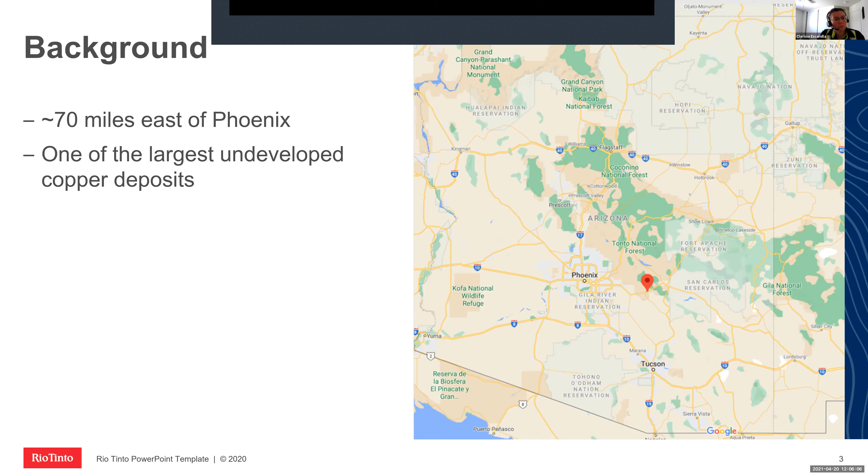So in porphyries, the mineralization occurs in the wall rocks. We have indicated and inferred resources of about 1,900 million short tons, with an average copper grade of around 1.5% copper. That puts it up there with Bingham and Grasberg and some of the bigger mines.

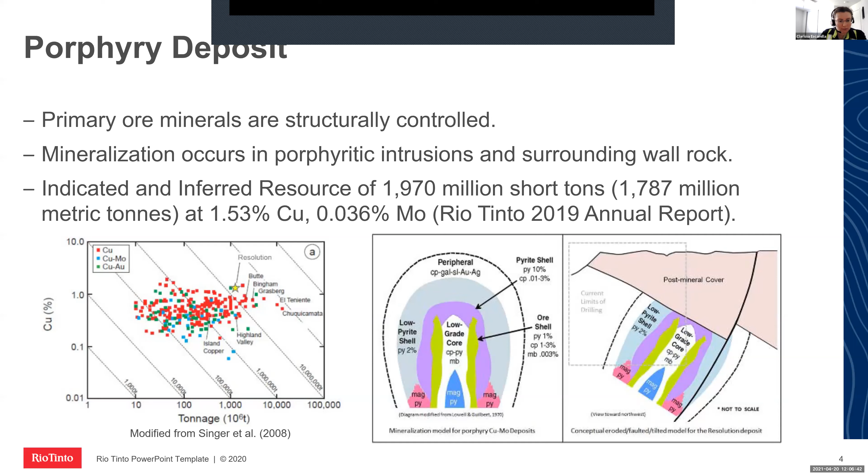So last year we were working on deepening 9 shaft. It was originally built to about 4,800 feet below the surface, and our project was to increase it a further 2,000 feet and connect it to 10 shaft. The excavated diameter was about 24 feet, and we finished deepening it in October. We got it to about 6,700 feet. We supported the shaft with shotcrete and concrete, and I'll talk about that in a second.

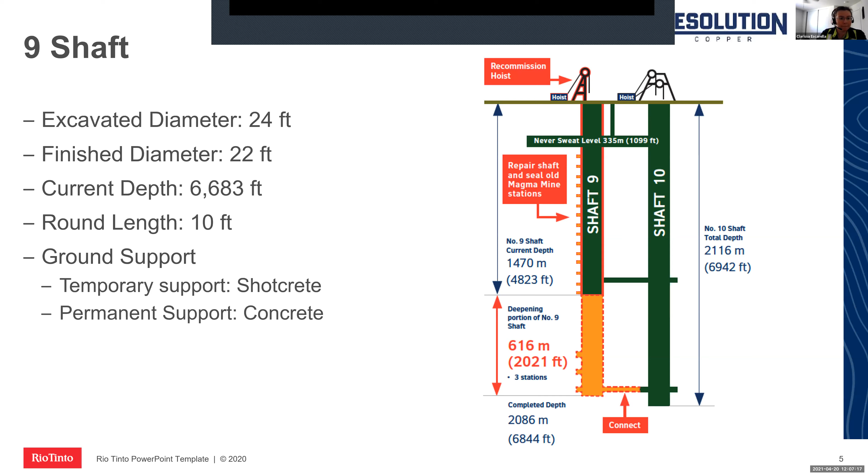Some interesting facts about the project: about 800 blue whales worth of rock were removed just to do those extra 2,000 feet. We installed 11,000 rock bolts. It's about 6,800 feet deep, which is 23 football field lengths, just to put it in perspective. We used about 500,000 pounds of steel, which is 3 times as heavy as the space shuttle.

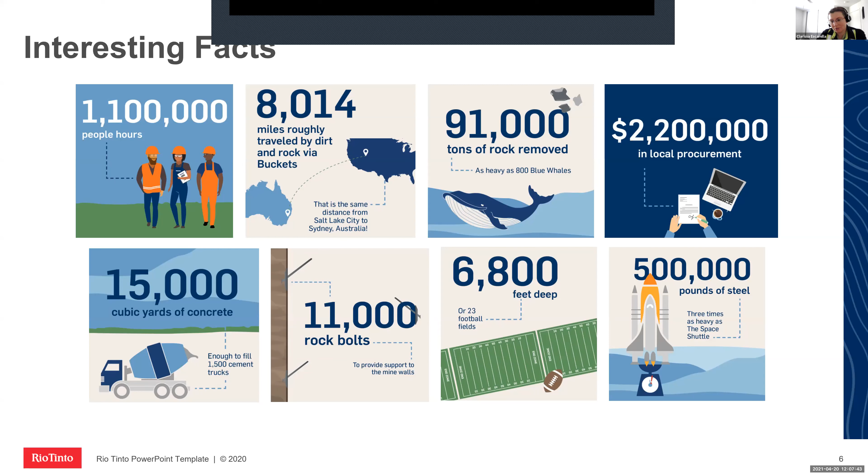So a shaft is a vertical opening that provides access to underground mines. They're used to send people and materials underground, bring ore out, and to provide ventilation and utilities. The purpose for deepening 9 shaft for us was to increase the ventilation and to provide a secondary escapeway to increase safety.

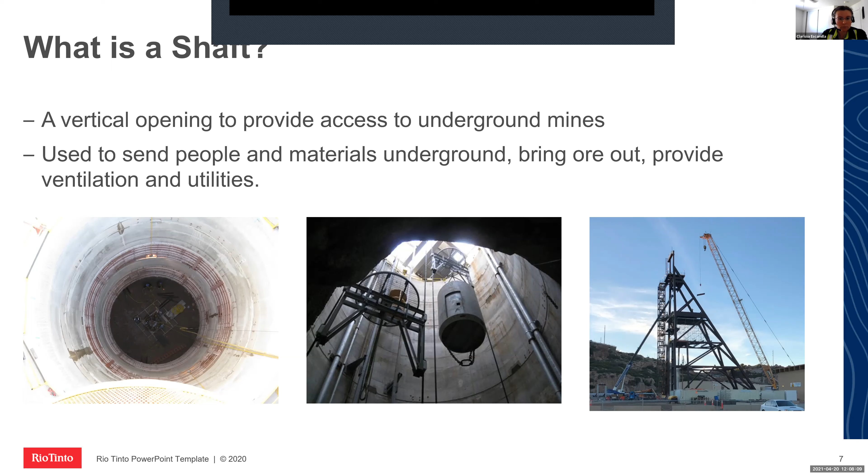So this is your typical shaft sinking cycle. On the far left, it starts with drilling. You drill out a round, and our rounds were about 10 feet. You blast it, then you muck it out, scoop all the rock out, put it in a bucket, and hoist it up. Then you install your ground support, and then you lower your permanent support, which is your concrete liner. Then you clean off the bench and scale it, making sure everything's good before you start over again.

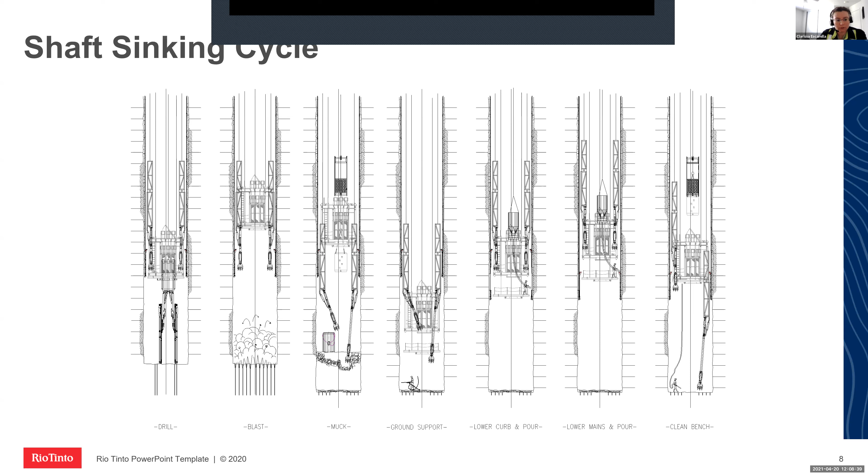So when you're supporting ground in the shaft, traditionally you use bolts and mesh. In the picture on the left, you can see the mesh conduct with some split set bolts there. At Resolution, we were using shotcrete and doing a boltless advance. So what we do is blast, clear out the muck, spray the round with shotcrete, and then lower the permanent liner. We could use the shotcrete as temporary support before lowering the permanent liner for anywhere between 36 and 72 hours before it had to be lowered.

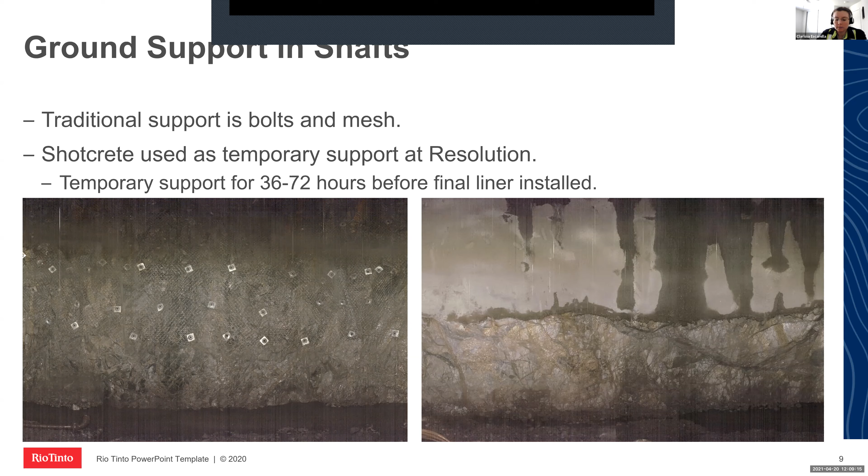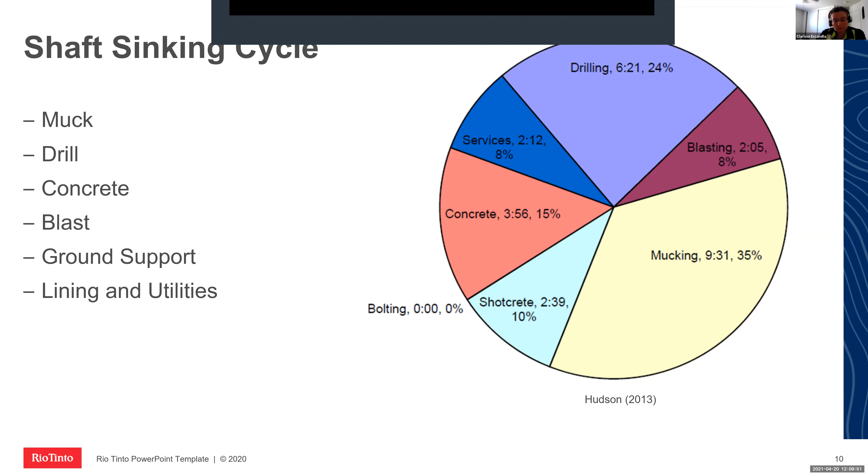In a shaft sinking cycle, most of the time gets taken up by mucking, about 35% of your time. Then drilling, which is about a quarter of the time, followed by installing your concrete liner. Shotcreting and services and blasting take about 8% each. We didn't spend much time on bolting with this method because it was all just shotcrete. We did have a few places where we bolted, where it was raveling or where the shotcrete just wasn't going to work, but for the most part it was mainly shotcrete.

So there's a few risks with doing this method. The distance between the permanent concrete liner and the shaft bottom is really important. The greater the distance, the higher the risk for failure is, because it's your permanent support and what's going to hold your shaft open. But the closer the liner is to your advance, it risks damaging that liner and cracking it, which can also be dangerous. So the liner has to be kept as close as possible, but still far enough away that it's not damaged. For us, this was about 3 rounds worth, 30 to 40 feet.

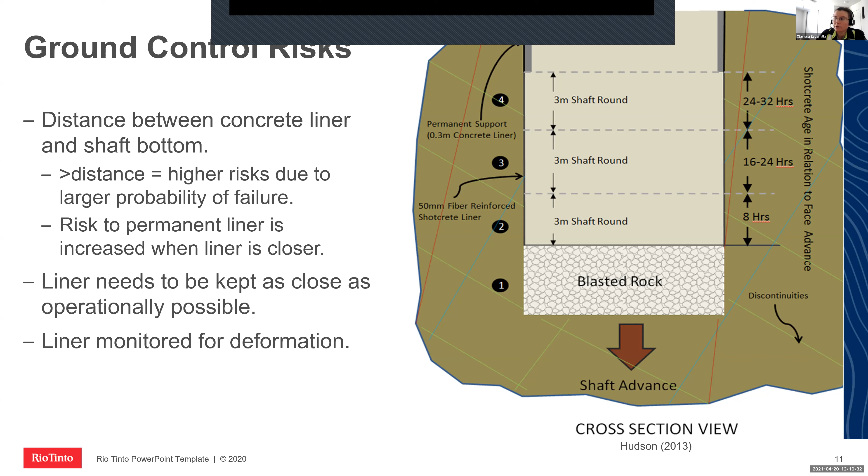Using shotcrete over bolts, some of the good things about this were a faster ground support cycle time, about 30% faster. It costs less than traditional support because you're just spraying shotcrete. It also acted like a skin and lowered the heat in the shaft. And there was less exposure to ground hazards for personnel working on the bench in the shaft because there's less cycle time and fewer incidents related to ground support occurred.

So some of the cons: respirators are required during shotcreting, and there is a small safety hazard because you're working with stored energy, spraying the shotcrete out of a hose. It also left less time for mapping the face. With bolts and mesh, you can kind of look back up and see past the mesh and see what's there, but shotcrete completely covers it. So you get your one chance to see the face, and that's it.

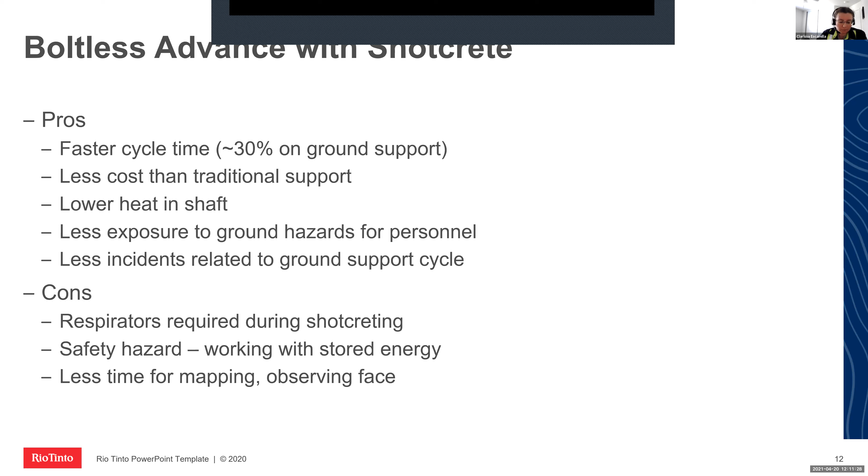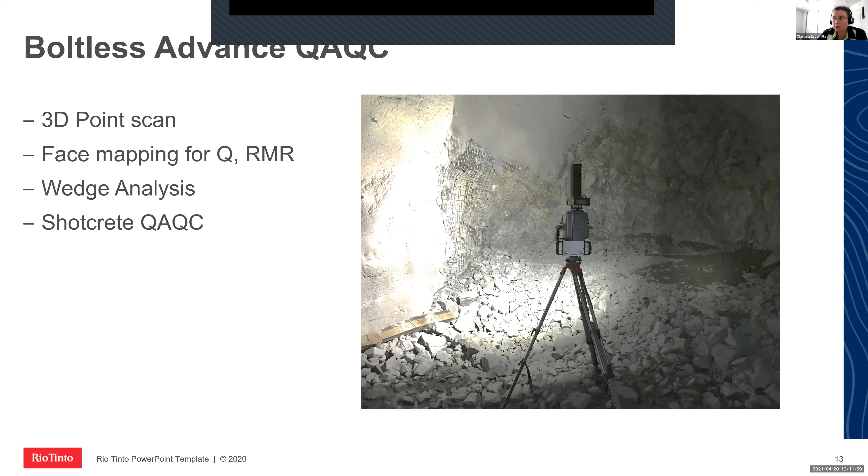To make sure this was progressing safely, we did a lot of QA/QC. This is a picture of our 3D scanner, which was very important for all our reporting. We took 3D point scans and did face mapping for Q and RMR values. We also did wedge analyses to make sure shotcrete was still the right method for each round, and then did shotcrete QA/QC to make sure our shotcrete thickness was adequate.

This is a picture of our 3D point scan, and on the right is a picture of the actual scan. Once you load it into the computer, you can spin it around, zoom in and out, and look at it. We'd compare the scan to the design and tell how far out of design we were, if we were overbreaking or underbreaking, and correct it before it became a problem.

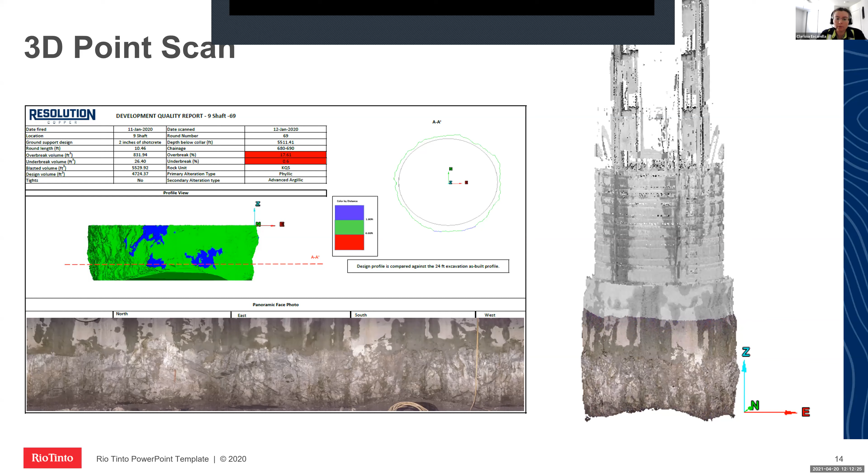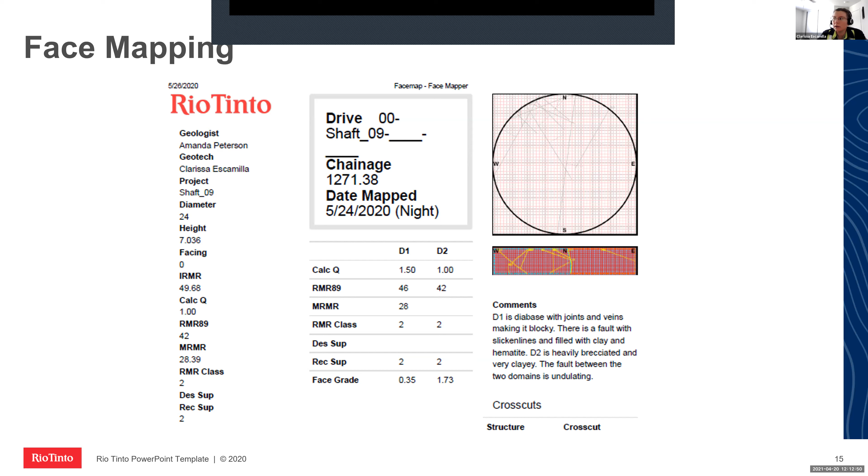We also did some face mapping. Before they shotcreted each round, they'd muck out the rock and send us down to look at the structures. We'd record the structures and their orientations to get a Q value, which we'd use to determine if there were wedges or if this was still the right method to use. The scanning also allowed us to get the actual true thickness of faults, which was really helpful for geologic modeling, because we could load up all the scans in a line and tell exactly where the faults were, what orientations they had, how thick they were, and where they were dipping.

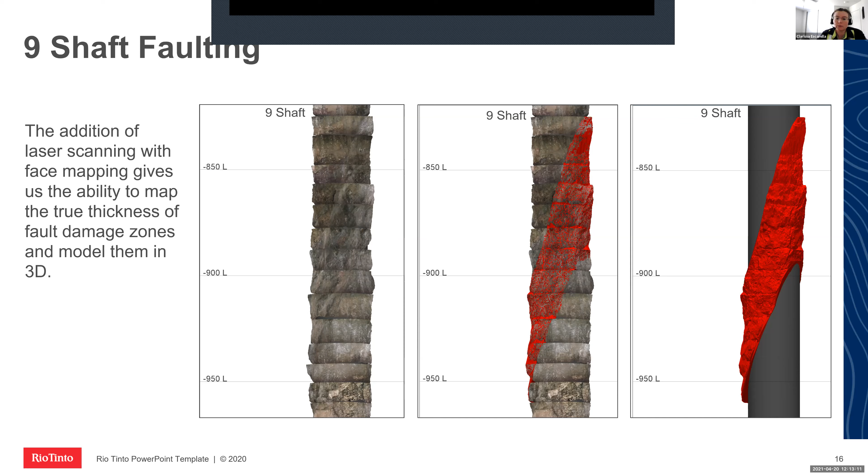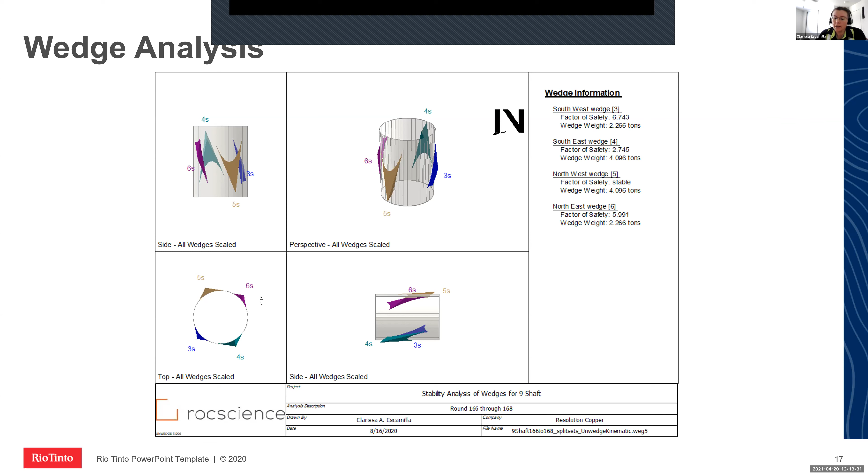We also did wedge analysis, which I mentioned before with the face mapping. We'd record the structures, and for any that were intersecting, we'd look at the factor of safety and determine if the shotcrete was thick enough to hold that wedge in place before we poured the liner, or if we needed to do something else like bolting.

With each scan we took, the scanner was able to pick up the previous rounds as well. Since we left about 3 rounds open at a time, we could load them up and see how the shotcrete thickness was looking, and any areas that weren't thick enough, they'd go back and respray before pouring the permanent liner.

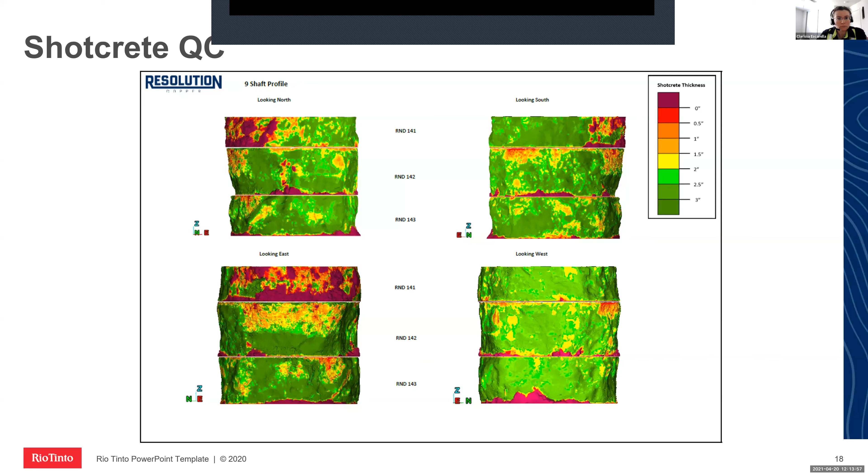Part of deepening the 9 shaft was breaking through into our TPL2 lateral development to connect with 10 shaft. We had Itasca do a model for us, and it indicated that the interaction between the shaft and the lateral development would start about 40 to 50 feet away. The crown pillar, the amount of rock between the shaft and the lateral development, when only 40 feet thick, indicated there would only be damaged and destressed ground left.

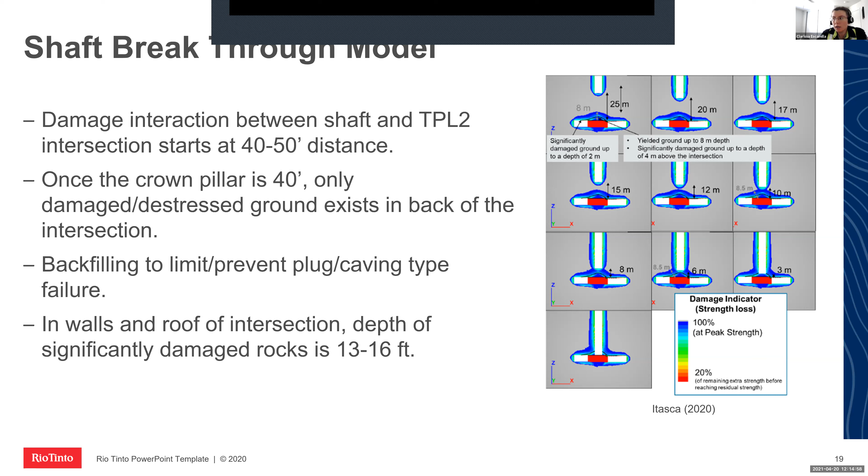So in order to prevent a caving type failure, we installed a lot of ground support in the lateral development, and we backfilled that area to prevent the caving failure. In the walls and roof of the intersection, it indicated the depth of significantly damaged rock would be about 13 to 16 feet deep, and that's about what we saw in our probe holes as well.

So breaking through into the lateral development, before the shaft reached 50 feet within the lateral development, we just proceeded as normal. Once the shaft was less than 50 feet from TPL2, we moved into phase 2, where we piled the muck underneath the area where the shaft was going to break through. We monitored for ground deformation and sent out daily reports. We decided that if we encountered poor rock in those 50 feet, we'd reduce the round length and pour the liner closer. We also did resin injections into the corners of the intersection to strengthen the rock.

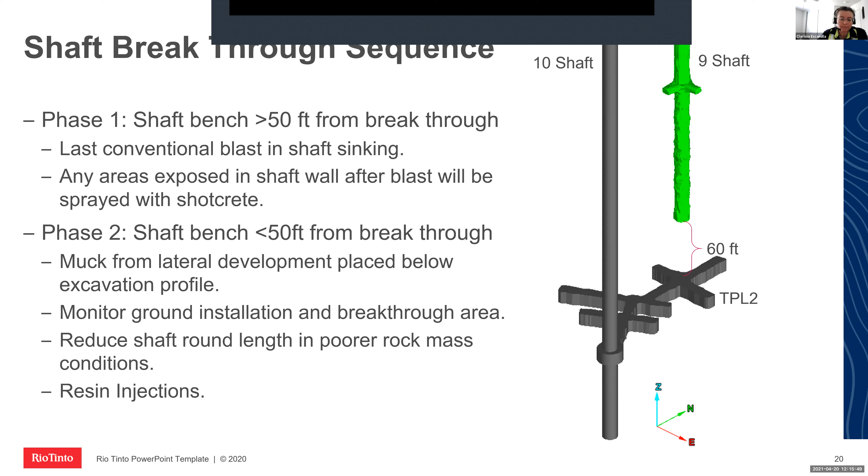So we installed a lot of monitoring systems to make sure everything went well. In the top right is a picture of an MPBX, which is an extensometer, and they measured the deformation in the rock, the extension. We also used blast vibration sensors to make sure we weren't aggravating any joints or faults.

We had fog lights, which stands for fall of ground. The way those worked were, if the rock moved more than a certain amount, it would turn red and everyone would know not to go into that area. We didn't have any problems with that though. They all stayed green the whole time.

And then we also installed geophones for looking at seismic events. But our geophones, we weren't able to get them calibrated before breaking through. So we were able to tell if we were having seismic events, just not where.

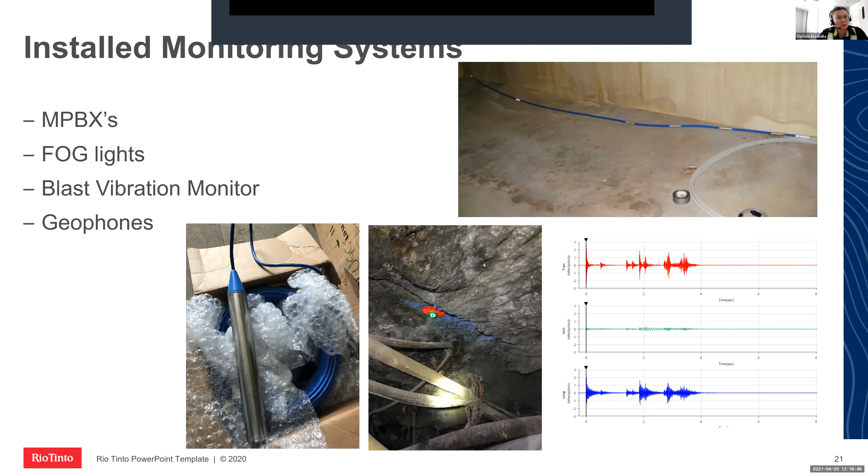The monitoring plan was essential, to make sure that the deformation didn't exceed the ground support. The blast vibration monitoring was really interesting to look at. We didn't notice anything weird going on with any joints or anything slipping. And then the laser scanning of each round didn't indicate any problems. We did a bunch of damage mapping and took photographs of the lateral development area just to make sure we could compare afterwards to make sure there wasn't any damage.

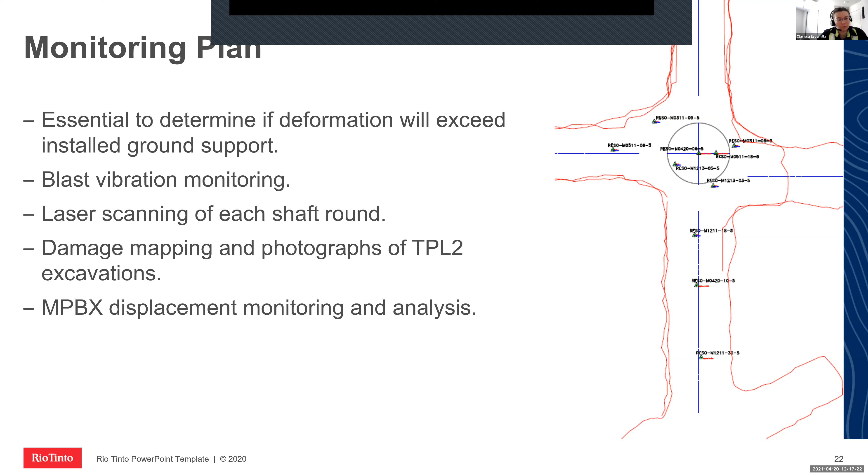And then we did a lot with the displacement monitoring and analysis as well. So this is the area where we put the muck underneath the area where the shaft was going to break through. We were a little short on muck, so we ended up building this wall around it and filled it with foam just to cushion it so it wouldn't damage the level when it broke through.

So when you're building a station, usually you want to cut the corners off because the stress concentrates there and they'll fall off. Since we were breaking into a station, we decided our last round was going to be a 20-foot round because we didn't want anyone walking on a 10-foot bench of distressed ground. And we didn't cut the corners because we weren't able to with the drills that far away. But it turned out really well because the ground was actually really high quality.

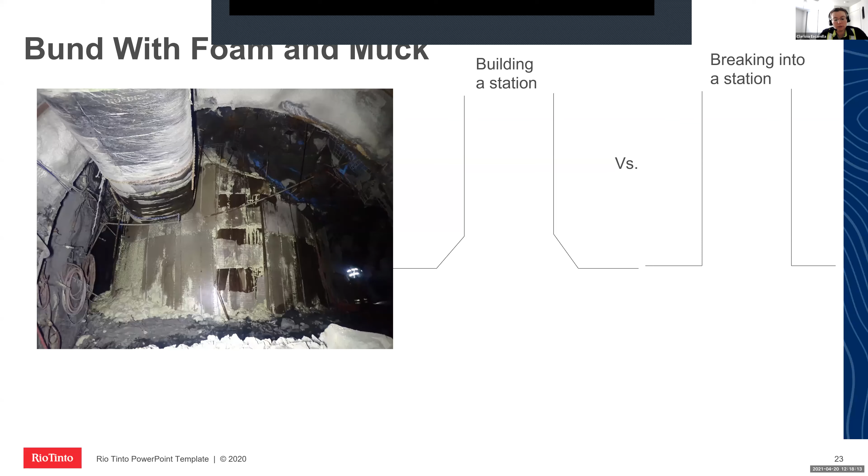So this is a video of breaking through into the area. The breakthrough area is behind that bulkhead. We weren't able to get a camera closer. But if you watch, nothing in the level moves. It's really neat. It's great.

The air rushing through is when the muck fell down. And nothing even shook. There wasn't any damage that we noted. And overall, we were able to complete it safely, which I think was a really big thing.

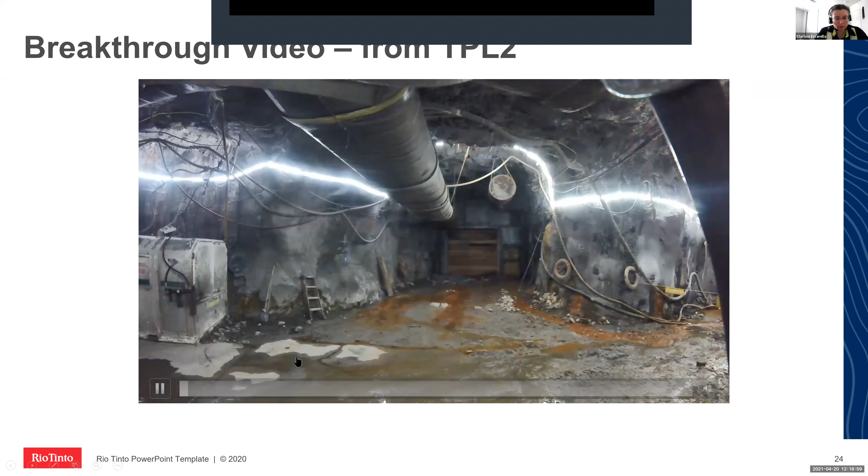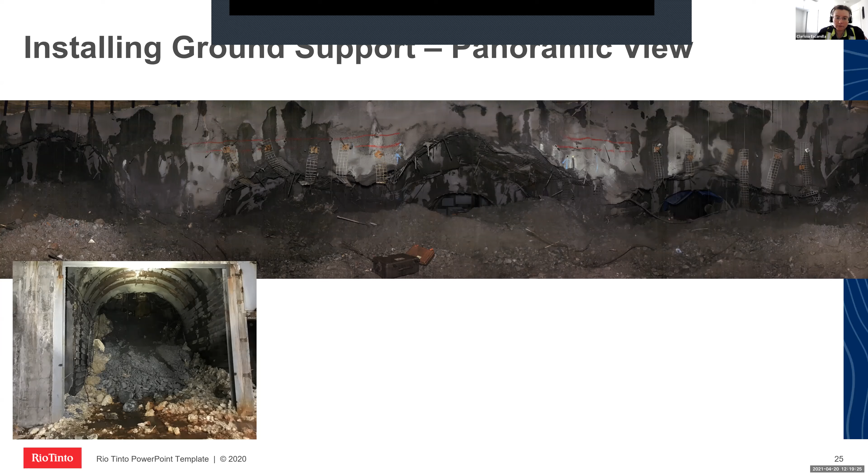So this is installing the ground support after the round's broken through. The picture on the bottom left there is the muck that spilled into the other drifts. We installed some cable bolts and some grouted dowels above, and since the corners are really sharp, we wrapped them with straps just to provide enough support so it stays stable.

Is there any questions?

This is great. Thank you, Clarissa. We actually do have some questions that have come in the chat and the question and answer. First off, what was the diameter of the shaft? The excavated diameter is about 24 feet and the finished diameter is about 22.

How much water was encountered? That's a good question. There was quite a bit of water. I'd have to double check that, to be honest, though. Not a problem, but water was encountered.

Okay. Yep. Was the sinking through the Pinal schist? Not that I'm aware of. It was mostly, I started at Resolution about a year ago, and they had already started the deepening. We went through some Paleozoic sediments and diabase.

How did you get into this field? What led you to this? So I started out in geology, doing ore control, and it was fun, but I really like the engineering side of things, and especially breaking things, breaking rocks. It's just been something that I find is fun, I guess.